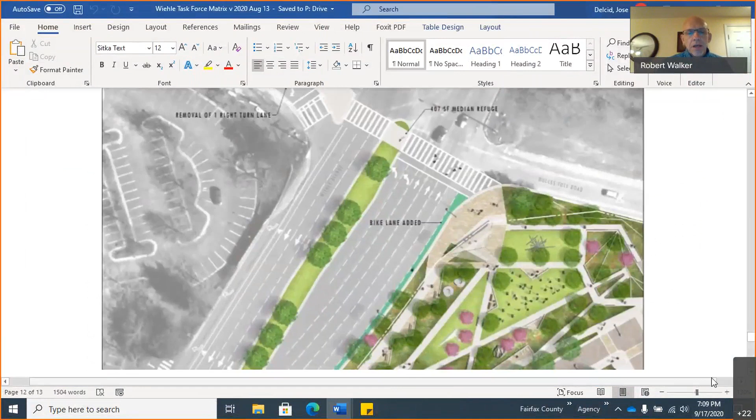This is an example of the matrix we've been using for the comments, and we'll populate that as the comments come along. Just to orient everybody, the graphic on screen is the at-grade pedestrian crossing. To the right of the page is the east direction where the Campus Commons development is proposed, kind of a corner park. That corner park has quite a bit of topography, grade that slopes away from you from left to right, and that corner park is there on the Campus Commons development.

Their idea was to funnel some pedestrians through their development, bring them to this corner location, have them cross over at the at-grade crossing, get to the west side, and continue on to the metro station. To give everybody a sense of scale, it's about 140 feet of crossing today, curb to curb, and it's quite a number of lanes of traffic. Some of that could be modified over time, or there could be a reduction of lane widths given different scenarios, and there's quite a big median in the middle that's part of that crossing.

So what we'd like to do from here is start taking comments, get people's opinions of the at-grade crossing and document some of that, and then we'll go into the Department of Transportation's presentation.

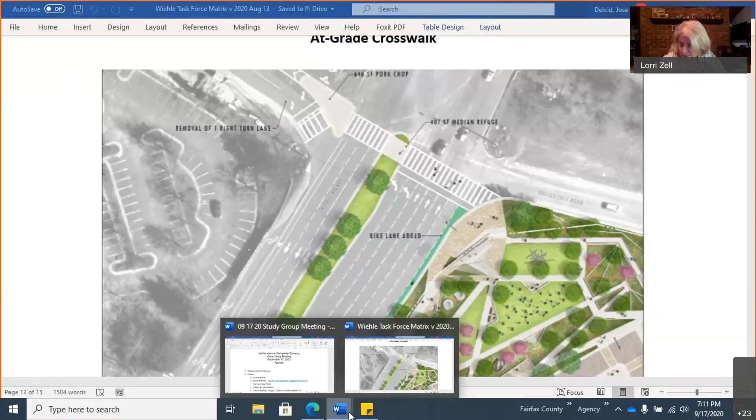Jose, if you could put up the pros, cons, and questions section for this, and then people can start going around, and if you're comfortable raising your hand, that's great.

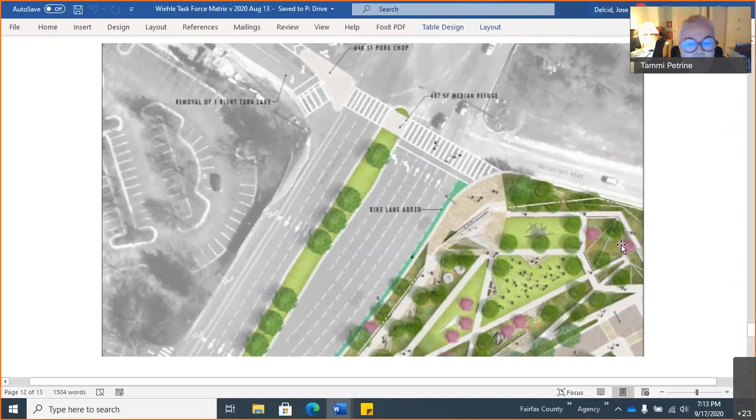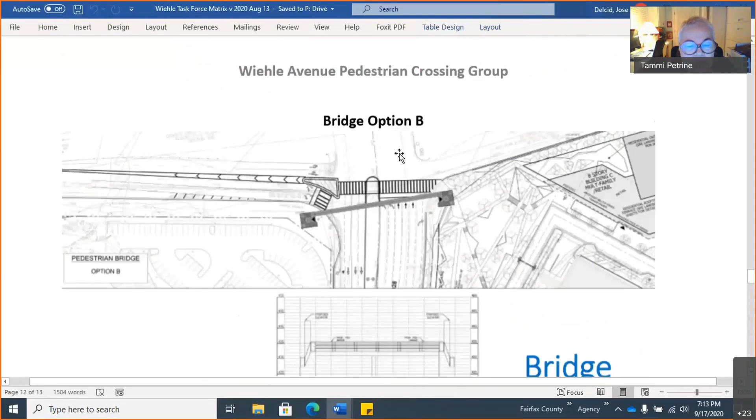We've discussed in the past that the pork chop, if there's plowing, will fill up with snow. You might be caught on that pork chop with an inhospitable dog. There may be too many people on the pork chop to accommodate the crowd. I think the pork chop is just a deadly piece of this proposal. If we could eliminate it by sliding the whole crossing further south, it would shorten the crossing distance. Is there any reason that would not work?

It would make a right angle off the ramp of the tollway to slow traffic down, so drivers would have to watch for pedestrians. So your question is, can we move that whole crosswalk back 20 feet to make it a little bit safer? Correct, and I'm picking the 20 feet, but since there's no scale on this map, just eliminate such a wide crossing and get rid of that pork chop that isolates people.

Can you tell us what you don't like about the current format of it? The pork chop is deadly. And the crossing time for pedestrians is so long that it will slow down the through traffic on the bridge. So the shorter we can make that trip for people, the better.

I think that's important - the crossing time is too long, and you don't like the pork chop, not just dislike it, but think it is dangerous. It's terribly dangerous. I've told you my story about seeing a woman jogger come by, two women with dogs on the pork chop, and one of the dogs went after the jogger. It was not funny because the jogger couldn't get off the pork chop. This wasn't here, this was at Sunrise and Wiehle. That was a potentially deadly situation.

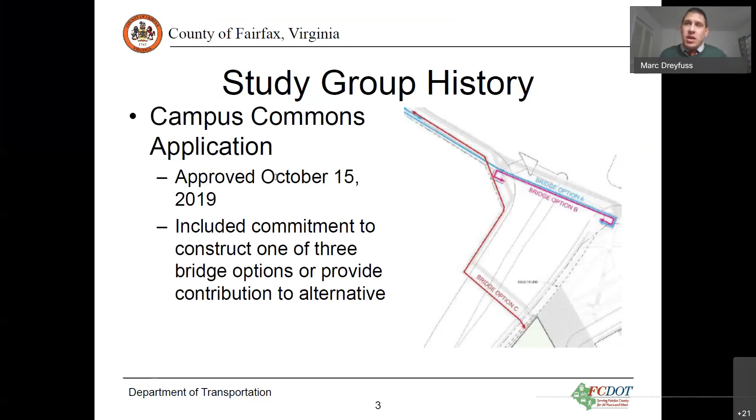So getting back to this, the Campus Commons application was approved on October 15th, 2019, and it included a commitment to construct one of three bridge options, or to provide a contribution of $1.65 million to an alternative. The application included a separate commitment, as Tammi mentioned, to an at-grade crossing of Wiehle Avenue. This could be in addition to a bridge or tunnel option, or it could be in lieu of those. So they've committed to put this in, as Scott mentioned, and somebody else mentioned about best practices — people will want to cross at grade regardless of other options generally, so providing a way for them to do that, regardless of how we work through this process, can be a positive.

This group was formed in December of 2019, and I think we then met in early 2020, tasked with determining the preferred crossing of Wiehle Avenue at the Dulles Tollway. The group, per the proffers, is tasked with recommending a preferred option to the Board of Supervisors within two years of approval, which would be October of next year. The Board of Supervisors then has to make a final determination within a year of the study group's recommendation, so that would be no later than October of 2022.

All right, so quickly, again, I'm going to review the discussions. These should be relatively brief and high level.

In terms of overpasses, there were two discussions: one about Option A, one about Options B and C. The major advantages described with the overpasses were that they're developer funded, which was noted several times, that they're something we have a high level of confidence would be built if that's what the board decides in the end to go with, and that they separate pedestrians from traffic. The challenges — TF Cornerstone mentioned these would be open bridges, which can be hot, wet, or icy.

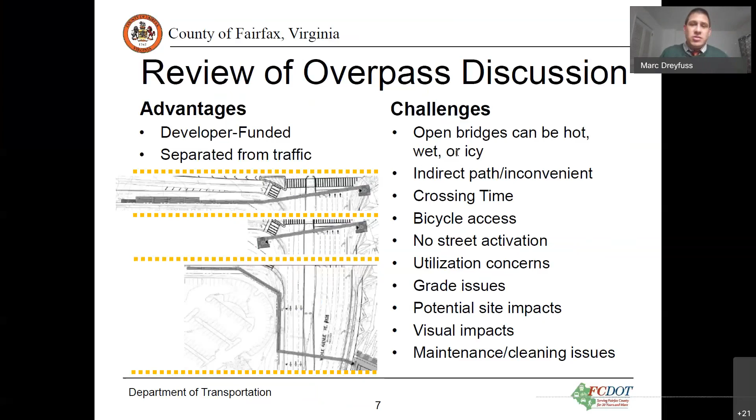So I want to talk a little bit more about maintenance. The elevators, for anybody who rides Metro, you'll hear from time to time that elevators are out and you need to go to a different station and there's a shuttle bus. If there's elevators here, if there's one elevator, there's no shuttle bus. So that is a concern to keep in mind, that while we could build a beautiful overpass here, we could have long-term issues with elevators. They need maintenance, they go out of service, as well as the impacts of those issues on ADA.

Cleaning, there's debris, there's smells, there's graffiti, there's vandalism that somebody would need to take care of. And then of course there's snow and ice clearance.

One of the challenges we have here is that TF Cornerstone's proffer says they'll take care of what's on their site, but the rest of the responsibility for the overpass would be to be determined. At this time, VDOT and FCDOT do not maintain overpasses generally, or at least elevators. There are some places we maintain overpasses, but it is a large responsibility and that has long-term costs.

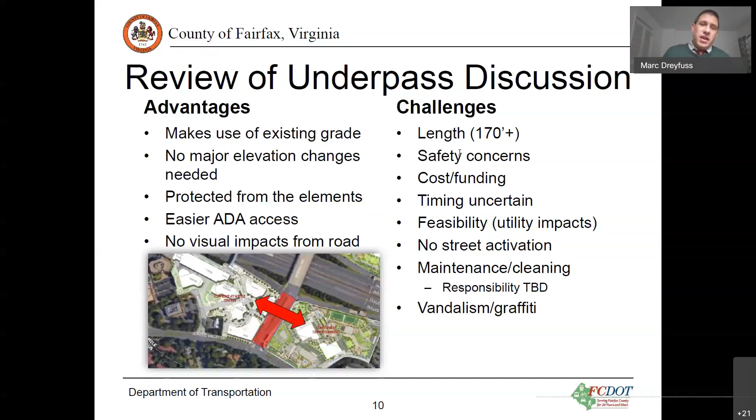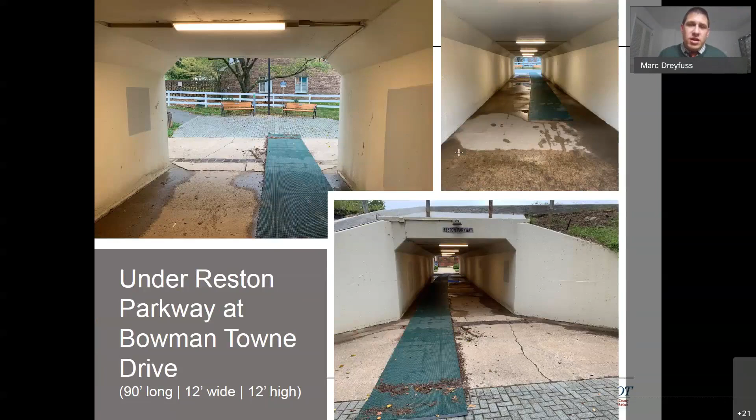So this is a good example of what an underpass could look like. As we move on, this is under Baron Cameron Avenue at Browns Chapel Park.

It is just north of Lake Anne and Washington Plaza. It's now about 10 feet high, so you'll see it's a little bit lower. It feels a little bit more like a tunnel. The lights are on the side. And so again, you have clear sight lines, but in the bottom picture, you can see that it creates some shadows. And at the end, there's hills, so you can't necessarily see who's coming into the tunnel.

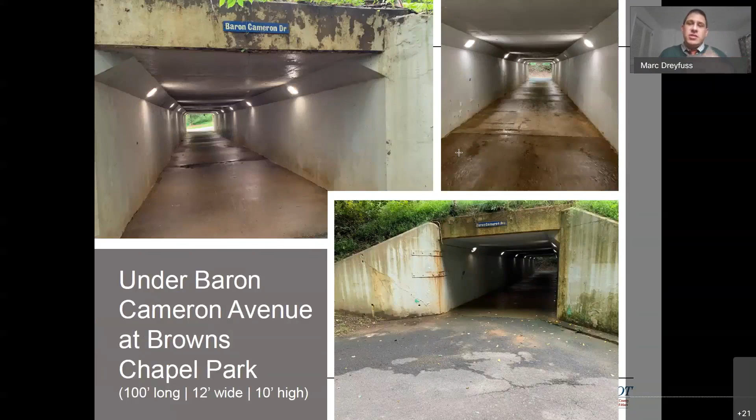This last one is very different. This one is under South Lakes Drive at South Lakes Drive Park. And one thing that's interesting here is it has a higher ceiling. The actual tube, I'll call it, is wide, but the trail is only 6 feet wide. And so you end up with a situation in which when I walked through here, there was someone walking the other way, and given COVID and everything, it was a little bit uncomfortable to pass. And so width makes this huge difference, but also height.

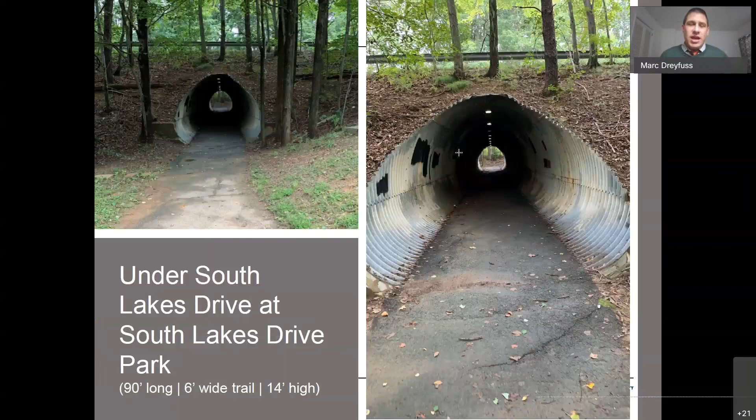In this case, you can see all the way to the end, but you get some shadows due to the length of the underpass. So just to recap, as a last step, since we talked about the

overpasses and the underpass, what I heard tonight was that there are advantages of an at-grade crossing. It's the fastest to implement. It's the cheapest option, the most direct option, and it may provide some traffic calming. The challenges, biggest one I heard was safety, also crossing time, snow clearance at the pork chop, and how it affects signal timing and drivers along the corridor. So that's just sort of a recap of what you all have talked about.

I know that you remember other things that you may have mentioned as well. But I hope I did it justice in general to go through that.

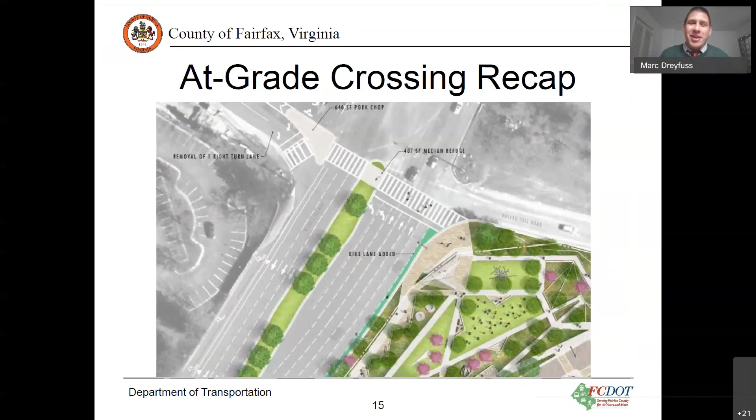And as we thought about all of this, we noticed some general trends, and there are some key considerations that we hope that you all will think about tonight and in October and in November as you come to your preferences: the long-term viability of each crossing type, the demand or utilization of each crossing type, the desirability of each crossing for users, the aesthetics, placemaking, modal balance - how are we doing justice, doing the best improvement we can for drivers, for transit users, for bicyclists, and for pedestrians. Safety, and of course, ongoing long-term maintenance, which is a more significant cost for some things than others.

And with that, I want to introduce the consultant. Fehr & Peers is a national multimodal planning consulting firm. We've had them on since about July 15th. So they've been with us for about 2 months. So they've caught up pretty quickly. They've been doing great work, but they've only been with us a short time.

And they actually have a sub-consultant as well, STV, which is doing civil engineering work and reviewing of the crossing options, including the overpasses. STV has worked on numerous multimodal projects across the country, including currently the Richmond Highway Bus Rapid Transit Project. And so the county is very familiar with them. With that, I want to turn it over to Cullen McCormick of Fehr & Peers.

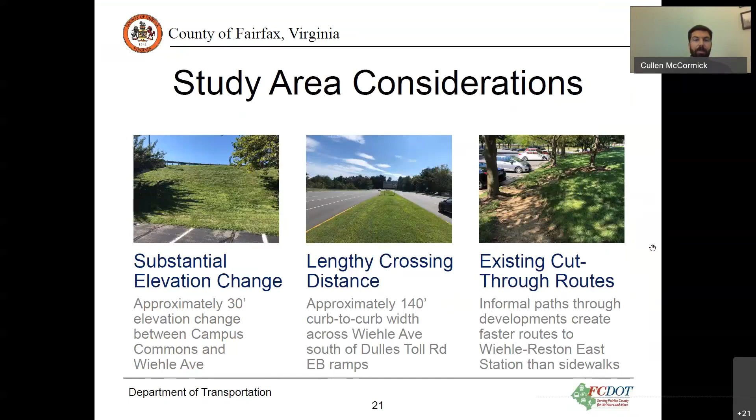So this slide and the following essentially give another visual of the different crossing alternatives. I know some folks mentioned being more visual learners, so hopefully this slightly more three-dimensional visualization here can help showcase some of the differences between the different alternatives.

If you look at the option on the far left, option A, you can see it's got this ramp on the left side, the west side of Wiehle Avenue, that doubles back and also includes a staircase. Then it crosses Wiehle right at the intersection and would have an elevator and a stairwell on the eastern side. The option in the middle is a little more straightforward in its footprint, with elevators on both sides and staircases on both sides.

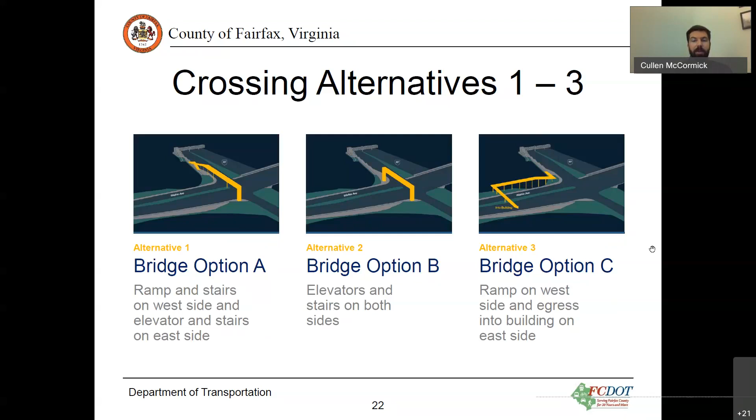The third alternative would be all ramps, so no elevators or any types of moving circulation like that. It would begin in a similar spot to option A, but as you can see, would actually extend further south and link up with one of the buildings being proposed in Campus Commons. So those are the three bridge alternatives.

The next slide shows some of the other variants. You see on the left is a tunnel. It would essentially find the narrowest point of the Wiehle Avenue cross section there. You can see the gray in that image represents a retaining wall, which already exists, so it creates a relatively effective structure to punch through that tunnel with.

And then the last two images, center and right, are the different at-grade options we're looking at. The first one is right at the intersection and would have that pork chop island, and then would come across the median where there'd be another refuge for folks to break up the crossing. The last one, maybe a new idea we haven't talked about so much on the call already, is the idea of potentially a mid-block crossing, which would be between the toll road ramps and Sunrise Valley Drive, so further south.

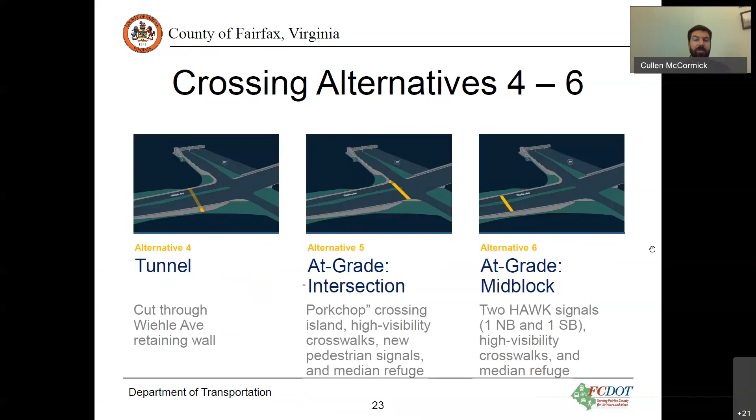So again, let's just move right into the meat of the presentation. I think this is what folks are most probably interested in hearing tonight. We've basically taken all the study group questions and tried to boil them down into some more succinct language here, just attempted to construct some themes throughout the different questions.

First up, we'll talk about how long it takes to cross using each option. Then we'll go through some of the key origin destinations in the sites and the desire lines where folks actually want to go, and how different crossings might serve or not serve those desires. What are some of the multimodal impacts? This is probably the section we've already talked about most, so if we're pressed for time I may try to breeze through that a little more quickly, but there are some important considerations there. And then last up, as many folks mentioned, are there any particular safety considerations we need to be concerned about as we look at different at-grade crossing options?

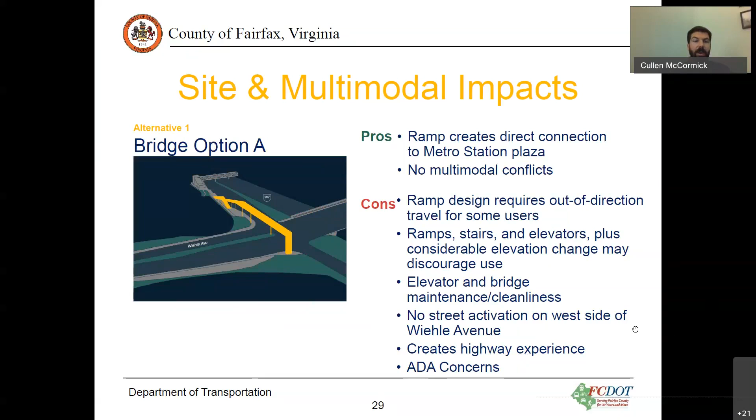For the second bridge option here, it's a pure use of elevators, so it kind of doubles down on that potential ADA concern. But in doing so, it also minimizes any out of direction travel.

Some of the cons, of course, we're still requiring users to go potentially up from the Campus Commons site to the grade of Wiehle Avenue and the toll road ramps, and then go up and above again. Particularly if there's already a crosswalk there, I think a lot of folks will probably make the mental calculation and say, why am I going to use this bridge when I could probably save some time and just walk right across the street?

And then this mirrors some of the other alternatives for the bridges in that it creates these ADA concerns and this highway experience, as we'll call it.

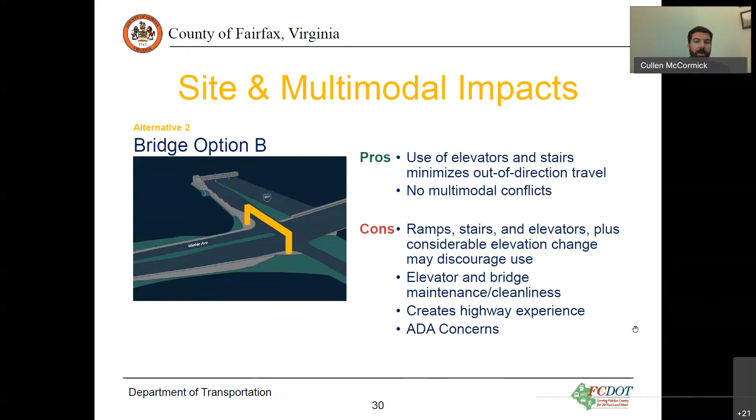So then the last bridge option here, by getting rid of the elevators, does give a bit of an advantage for folks who are rolling through the area, either on bike or wheelchair. It carries that direct connection to the Metrorail Plaza, and also has fewer multimodal conflicts because again we're separating the different people who are moving by different modes.

This ramp though probably has the most out of direction travel for folks who are not necessarily going directly to the Campus Commons site. The way this is envisioned, you'd go into a stairwell or elevator lobby in one of the Campus Commons buildings, then filter down to the site and use the on-site walking path to get to your destination.

So this might potentially discourage folks who are not familiar with the Campus Commons site, or who are trying to go somewhere not immediately served by this route, from using this crossing. And the out of direction travel here would also tend to extend travel times. As with a lot of bridges, there are some maintenance issues, visual issues, and that notion of the highway experience.

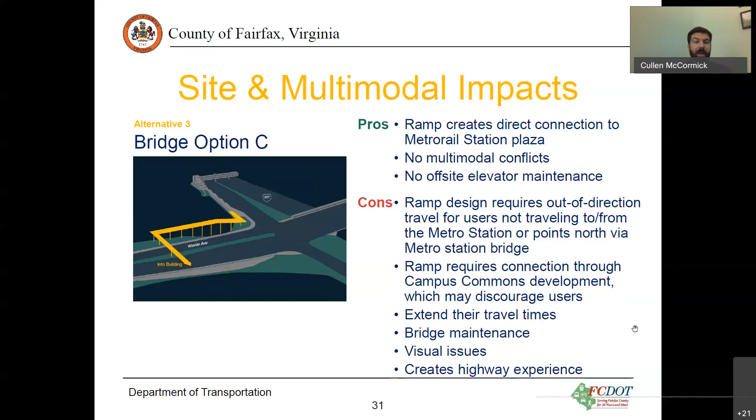So then the underpass, we try to just stick to the facts here, looking at these different crossings. Although costly, the underpass has this natural advantage that it takes advantage of the grade already present to avoid excessive elevation change. It has, as we saw earlier, that very short, consistent crossing time that basically outperforms any of the other alternatives. And like the bridges, it doesn't have any of these multimodal conflicts we've talked about.

Some potential out of direction travel could occur here, like if you're coming from the neighborhoods to the southeast, you would of course have to go down into the campus commons site to cross here. I think we can probably assume a fair amount of folks are going to the Metrorail station, so probably less out of direction travel on the west side.

But if you did, for example, come across the road bridge across the toll road and you wanted to use this underpass, since you don't want to use the at-grade crossing, you'd have to make your way down to the recessed lower grade where the tunnel is located. As with all tunnels, it tends to have a higher cost because you'd have to actually bore the tunnel through the retaining wall there.

You couldn't do a cut and cover, which is basically where you dig a hole and put a top back on it, because that would affect traffic operations on the road. The design is very critical to folks feeling safe using this, and going hand in hand with that, there are potential security concerns related to lighting, cleanliness, or potentially stormwater being in this tunnel.

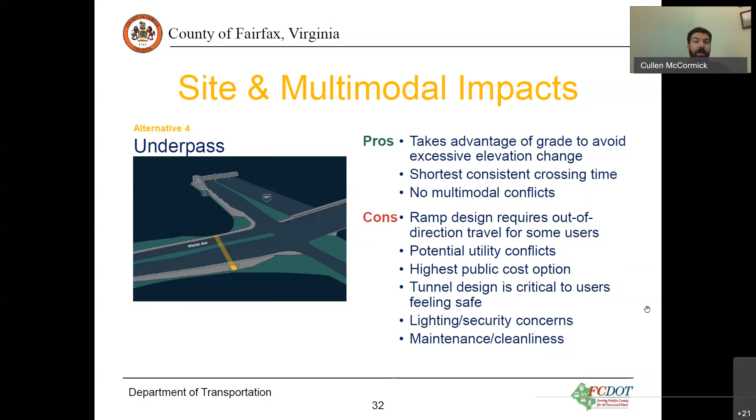So then last up, we've got the two at-grade intersections here. As folks have noted earlier in the comment period, this may be the lowest cost treatment. We're still working on the cost estimates, but because it would essentially already have signaling infrastructure in place, it would just require some modifications -- in this case, adding the pork chop, adding some pedestrian signal heads -- relatively low cost.

Because it's going straight from point to point, crossing the intersection here from one corner to the other, there's no real out of direction travel associated with this. Because it encourages folks to walk on the street, to be in the public realm here, it has this potential to increase street activation.

This alternative can potentially achieve this modal balance by, as Mark mentioned earlier, the pork chop allows auto traffic to move coming off of the toll road ramps, while folks can cross safely and not have to cross two turning lanes there without a protected signal to get them across. There are some cons to this approach.

I think folks have mentioned safety, which we'll talk about in a couple of slides here. Signal timing would also be required -- basically to move the same folks through the intersection, we need some modifications, which I think are already considered by the applicant's plan for this crossing here.

And I think, as folks noticed earlier, it would require people who are walking to have this two-stage crossing. So picture if you're coming from what's currently shown as the bus plaza in this rendering -- which of course the bus plaza will go away, but that area will stay the same.

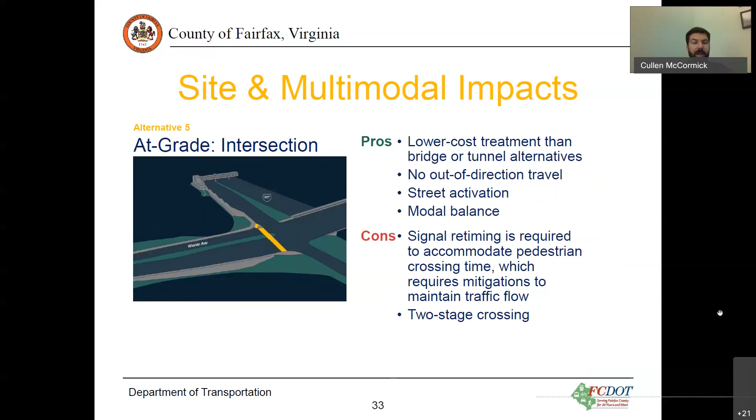You'd first have to cross onto the pork chop island, that very yellow piece of crosswalk where Mark's arrow is there. And then because of the way the traffic moves, most likely you would need to wait to then cross again to go across Wiehle Avenue. So that's what we mean by a two-stage crossing there.

And at the mid-block here, this would again be one of these lower cost treatments because it's just going to require signaling. What's actually potentially nice from a pedestrian standpoint is that you don't have any turning vehicles here, so there are fewer conflicts for someone crossing the street. It's also in the mid-block, so you don't have the corner radii where cars turn from Wiehle onto the toll road -- you've actually got a shorter crossing distance, and you still have that median to break up the distance in the middle.

Of course there are cons to this alternative -- adding a new crossing between the relatively short distance of Sunrise Valley and the toll road ramps could potentially create a new factor that causes driver delay, as it would be one more place where someone might have to stop.

We call these HAWK signals. Basically it's kind of a push button that a pedestrian pushes to turn the signal to a walk sign for them and stop cars. HAWK is just a jargony way of putting that. But adding this HAWK signal would be more expensive than the pedestrian signal heads at the intersection crossing, because of the new infrastructure that would need to be installed, potentially coordinated with the other traffic signals.

This crossing would likely still have the two-stage design to get folks across in a safe amount of time, given that it is a fairly wide crossing. And then it would also have some safety concerns.

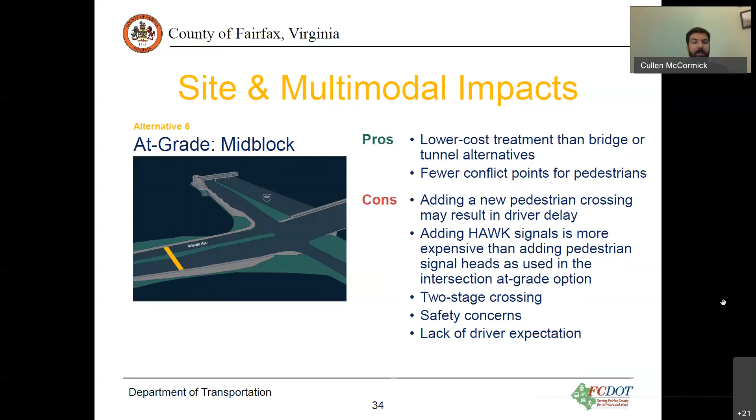Sometimes people don't wait for people who are crossing these types of crossings, and you can potentially run into issues of cars and people having conflicts there, which is the last bullet here of lack of driver expectation.

I recognize this is a little bit wonky and jargony, so there are some comments that we can address at the end here, with some questions.

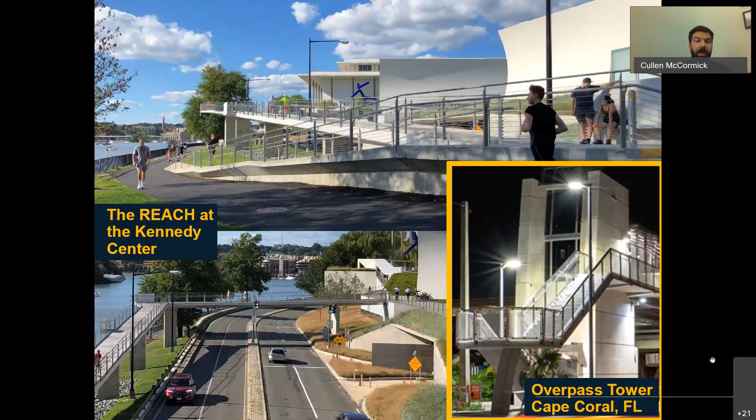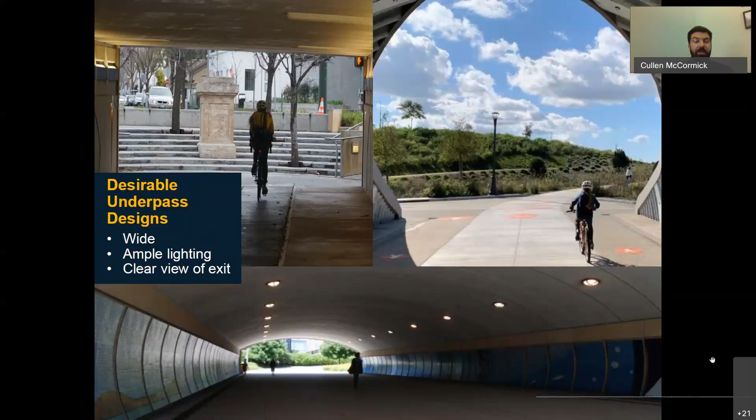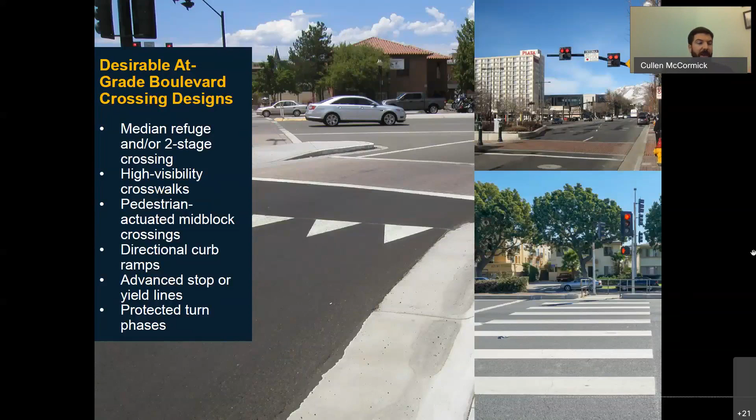So that's probably the key reason why the pork chop is being proposed as a safety measure, to make sure that when those heavy volumes of right turns are coming off or onto the toll road, you don't have people trying to cross at the same time. Of course, people will make opportunistic moves, and we can never design for everyone, but ultimately those protected turns are very much a safety treatment.

So thank you, Cullen. As Lori mentioned, we only have a few minutes, so what I'd like to do is just briefly introduce October, and then I'll turn it back to the group so I make sure everybody's aware of what the next steps are. So what we hope to bring you next month are a few things.

One is a crossing demand analysis. One thing Cullen mentioned in his presentation was looking at how many people really want to get across the street here, and then how will each option affect use. So crossing times, usability, safety, et cetera, can affect those things.